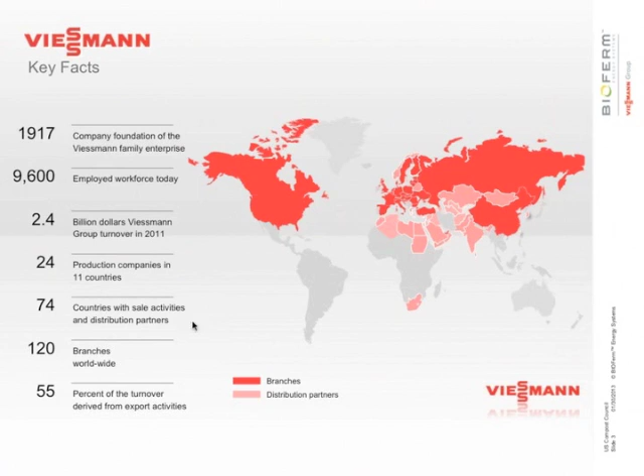A little bit of background on BIOFerm Energy Systems and who we are. We're a subsidiary of the Viessmann Group. The Viessmann Group was founded in 1917. It currently has over 9,600 employees, and it does $2.4 billion in revenue each year, with 60% of their business being in the renewable energy sector. This is a range of their products, ranging from heat boilers to anaerobic digestion.

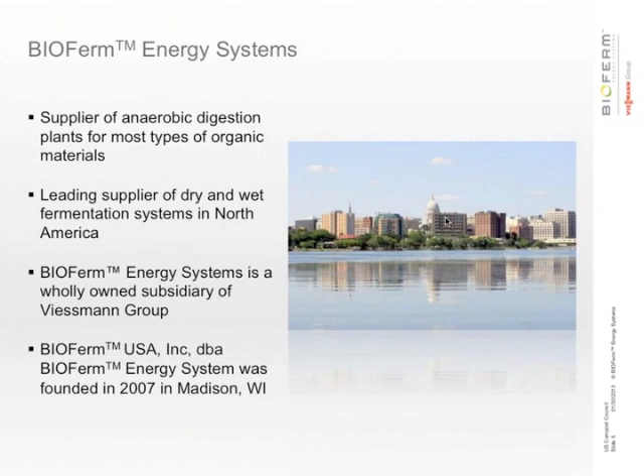BIOFerm Energy Systems is located in Madison, Wisconsin. We've been here since 2007. And we're a technology supplier of anaerobic digestion for almost any type of feedstock. We supply both dry and wet fermentation technology in North America.

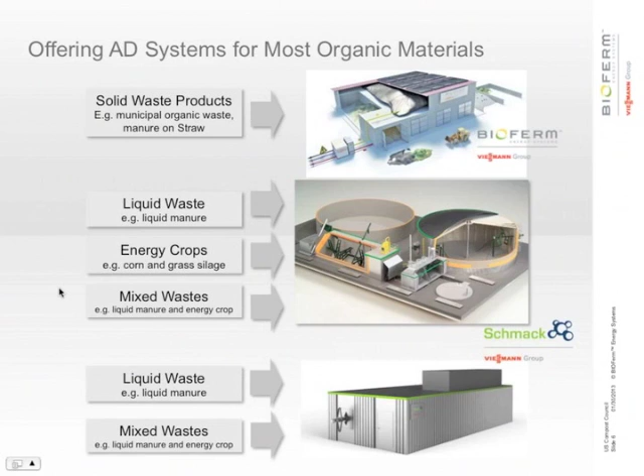The last technology is our newest model. It's a small containerized digester. It's slightly larger than a shipping container and it's all in one. So this digester has the digester tank and CHP, the energy production unit, all in one container. This unit takes feedstocks such as food waste, manure, energy crops, a wide variety.

Here's a breakdown of the three systems again. So the wet digester, which people are most familiar with, is what's called a wet system. It takes feedstocks that have a range of 8 to 12% total solids in it. The feedstock needs to be pumpable. That's one of the key factors. The second system is our EUCO, our plug flow, which is similar to that smaller containerized unit, and it takes feedstocks from 10 to 25%. And the last one is the dry system, typically a feedstock range of 25% total solids and higher.

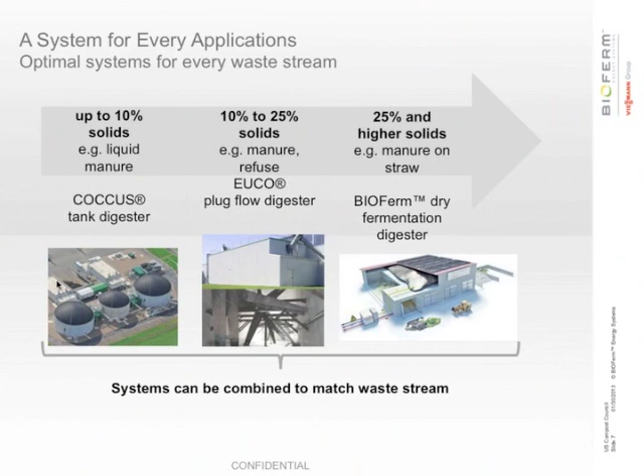The way this works is you mix half fresh material and half digested material and then reload it into the digester. This is done to inoculate the material, to help heat up the new digestion process, to help the bugs be present in the new process, and to make your biogas production quicker.

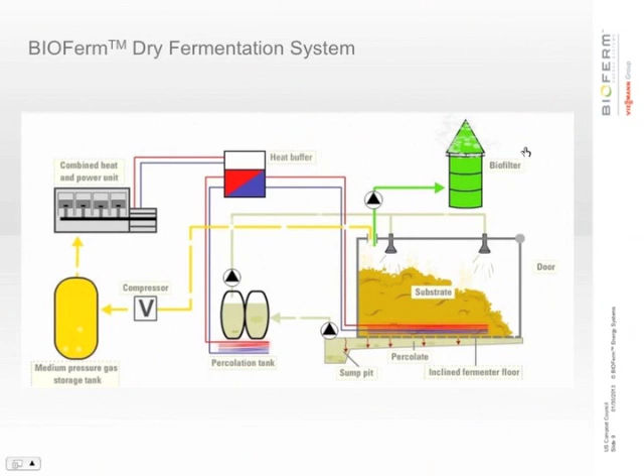This whole operation is kept under a biofilter so that if any part of the process, your substrate handling, your feedstock handling, mixing, opening of the chamber's doors is happening, all the gas that's produced in that area is collected and goes through a filter so that no odors are released to the surrounding area.

So this is kind of just a summary of what I previously talked about. The digestion process is 28 days. This can range from 20 days to 40 days depending on what your feedstock is. Food waste tends to break down much quicker than substrates that are more coarse, such as animal bedding and yard waste.

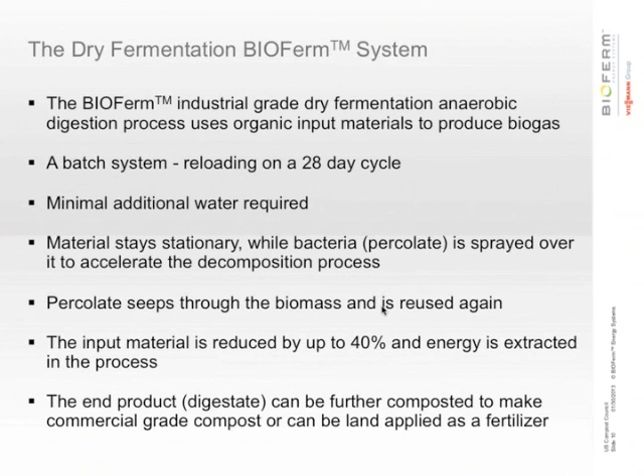Minimal liquid needs to be added. As digestion happens, water is produced, so you collect that water and you store it in the liquid percolate tank, which is then used to accelerate the digestion process. Materials are stationary, there's no moving parts in dry fermentation. The input material is reduced by 40% as energy is extracted. The end product, which you remove from the digester, is called digestate, and this is where composting is involved.

So I wanted to go over some common myths of anaerobic digestion. Myth number one, it's smelly. A lot of people think of digesters and they think that they're odorous and they smell worse than dairy farms. But this is not always true. This is why our whole operation is kept under a biofilter. So any odors that are emitted during the process are collected and moved through a biofilter.

Our biofilter that we use at our facility here in the U.S. is a biological biofilter. The gas will move through a biological filter where the microbials eat the smelly components and release clean air. The smelliness of the digester depends on what substrates you're handling. Some substrates break down much quicker, reducing more odors, and other substrates don't.

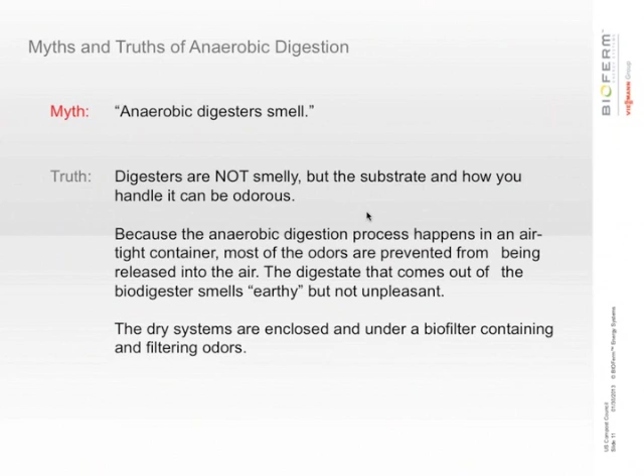Another common myth is that all the valuable nutrients are lost during the digestion process. This is not necessarily true. During anaerobic digestion, the volatile organic compounds are converted to biogas. Biogas is a combination of methane and carbon dioxide primarily. Methane is made up of carbon and hydrogen. So the main components you are losing from your substrates are going to be carbon and hydrogen.

After the digestion process, typically the digestate is composted further. So in order to get your carbon to nitrogen ratio back up, you'll have to add a carbon substance, whether that be bulking wood material, yard waste, or whatnot.

During the anaerobic digestion process, any nitrogen, phosphorus, or potassium in manure or food waste is converted more easily to absorbable nutrients. These absorbable nutrients are actually better, meaning that they're higher quality nutrients. And also, one thing to mention is that the volatile organic compounds, which are the smelliest compounds in your feedstock, are converted during anaerobic digestion, which reduces the odor issues.

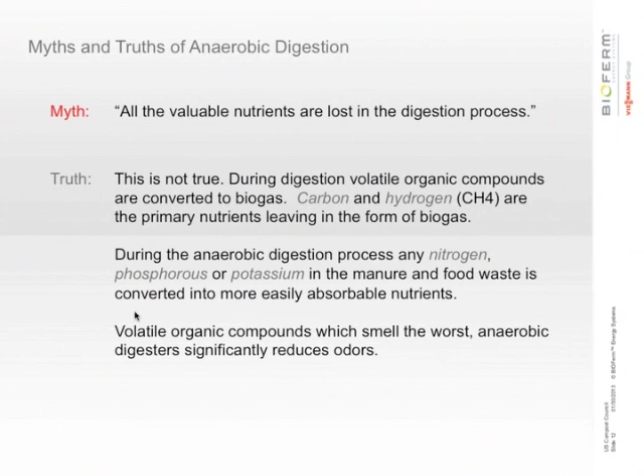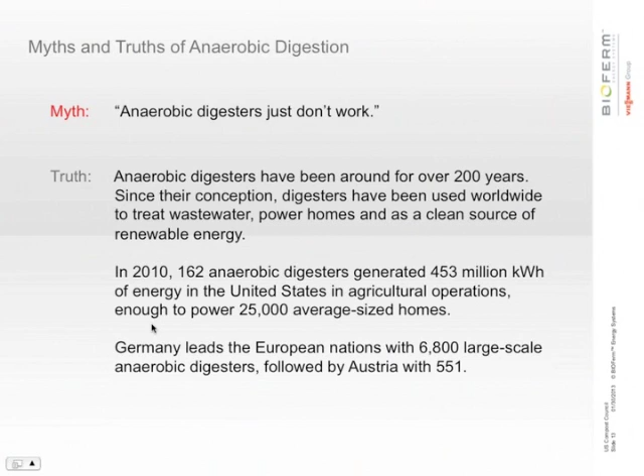And as most people are familiar with, Germany is the leader in anaerobic digesters, having over 6,800 large-scale digesters ranging from farm-based to food waste applications and whatnot.

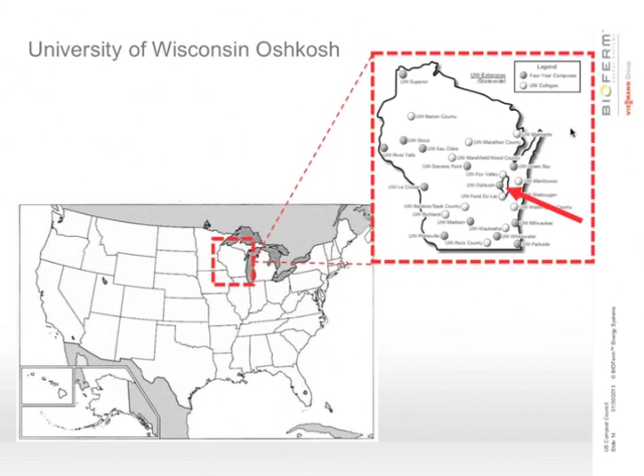So our first installation of dry fermentation in the U.S. was in Oshkosh, Wisconsin. We had a partnership with the University of Wisconsin-Oshkosh. They have a goal to be off-grid, be carbon neutral by 2025, and this was one of their projects to help them meet that goal. Their facility is a 4-fermenter dry fermentation facility. Their installed electrical capacity is over 370 kilowatts.

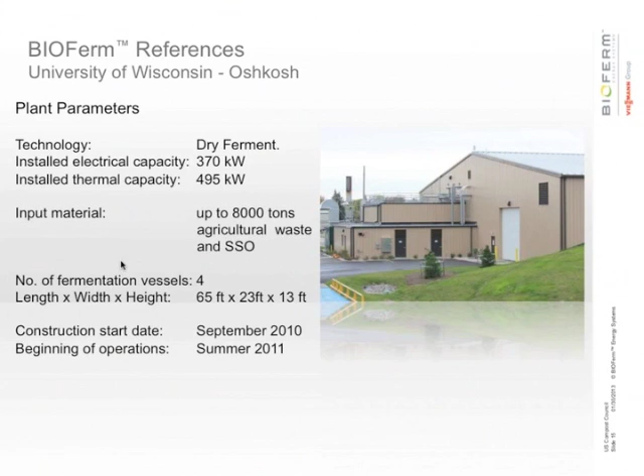Their feedstock consists of food waste and yard waste. Food waste primarily from grocery stores, and the yard waste from the campus and the city of Oshkosh itself. As I mentioned, it's a 4-fermenter vessel. These are actually short fermenters. The typical fermenter is 99 feet long. They went with a shorter one because they had concerns with not getting enough feedstock. So they are 65 by 23 by 13. Construction began in September 2010, and they've been over a year and a half in operation now, producing gas.

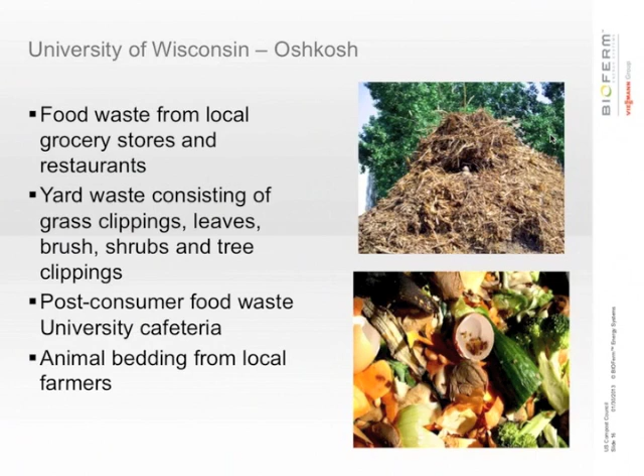As I mentioned, their feedstocks consist of food waste from the local grocery stores and restaurants, yard waste, which means grass clippings, leaves, shrubs, and wood chippings from both the city of Oshkosh and the university landscape itself. Post-consumer food waste, they're taking in a small bit of post-consumer food waste from the university's cafeteria, and animal bedding from the local farms.

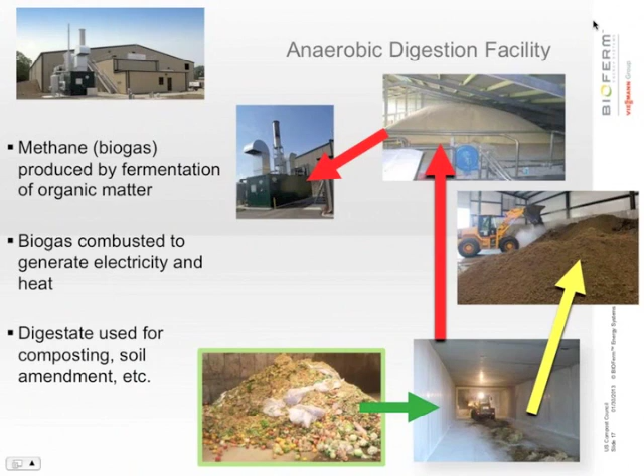So a quick flow chart of how their process works. They take in the food waste, which is the bottom picture you see, the green one. As I mentioned, it's mixed with pre-digested material. It's then loaded into the digester chamber with a front-end loader. Out of the digester after 28 days comes the digestate, which looks similar to the third picture you see with the front-end loader. Digestate looks similar to wet compost, very earthy. As it breaks down, it produces biogas. In their application, they burn the biogas to produce electricity and heat. They produce enough electricity currently to power 10% of their school's need.

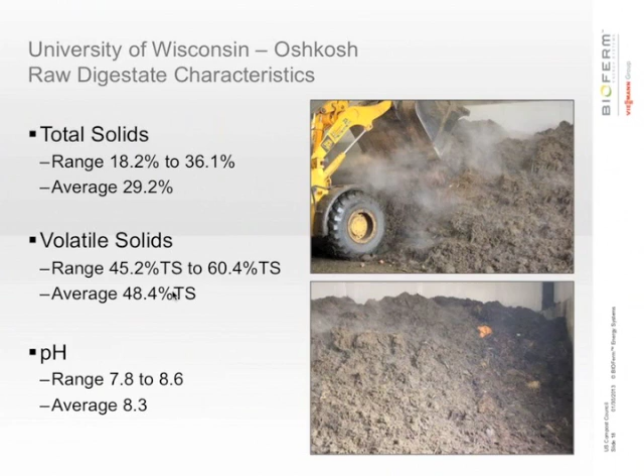So they have created a partnership with a local composter. The composter takes the digestate and composts it further to a finished product. The digestate that comes out is typically about 28% total solids. It looks, like I said, like wet compost. The volatile solids is typically in a 48% range of the total solids, and the pH ranges from 7.8 to 8.6.

The composter then uses a windrow to aerate and further process this material. There's minimal addition of carbon used and minimal monitoring. He monitors temperature and pH. It's a very low budget operation, but it seems to be working well for him.

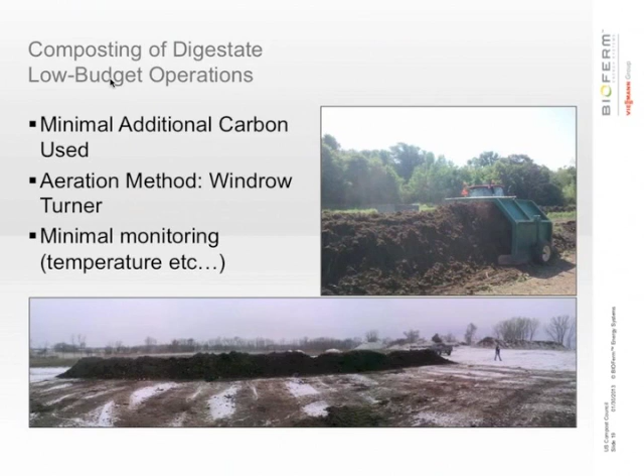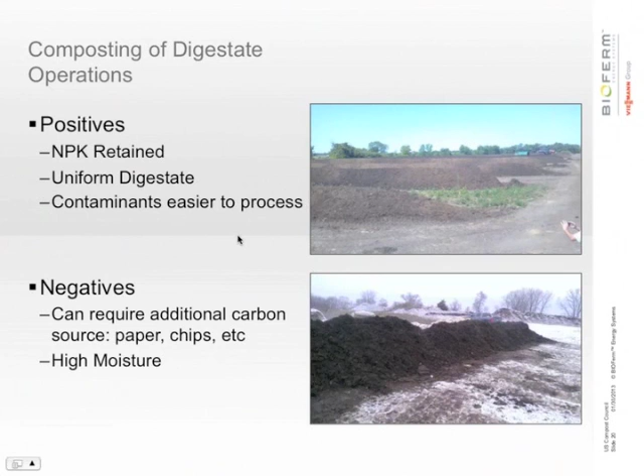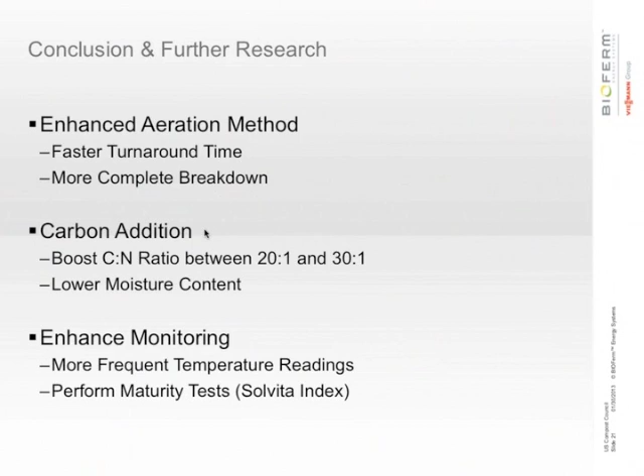I think that's all of it. So, okay. I'll open it up to questions.

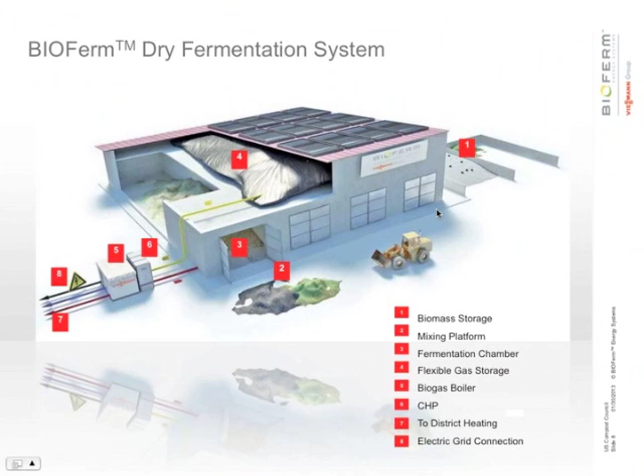And so all that material is stored in that Area 1 until a digester is opened and ready to be reloaded. And so then we pull some material from Area 1 and mix it with old material in the Area 2 right in front of the fermenter itself, and then we load it in.

Next question is, what is the typical NPK analysis for food residual digestate? I don't think we actually have those numbers available on any of the current feedstocks we've been using, and most of our feedstocks going into the digester, the food waste component's only 10 to 20%, so it's not entirely food waste going in there. That's definitely something we want to look into a little bit more, and I know the university is planning on doing some research with that this year in line with the other compost research that they want to do as well.

Is there any testing done on the digestate for metals and pathogens? They have looked into it, I know, because they're trying to get the classification between Class A and Class B biosolids. They don't do it on a consistent basis, but they have done it on a few batches, and I don't think I have those available offhand. I'd have to go to the university to get the data.

This question is concerning the sizing of the materials. Does the yard waste need to be chipped or size reduced before being put into the chamber? No, not necessarily. You want these materials to be stackable, and if you're putting too small pieces in there, then it's not going to be stackable. So typically, we'll just load them in as is.